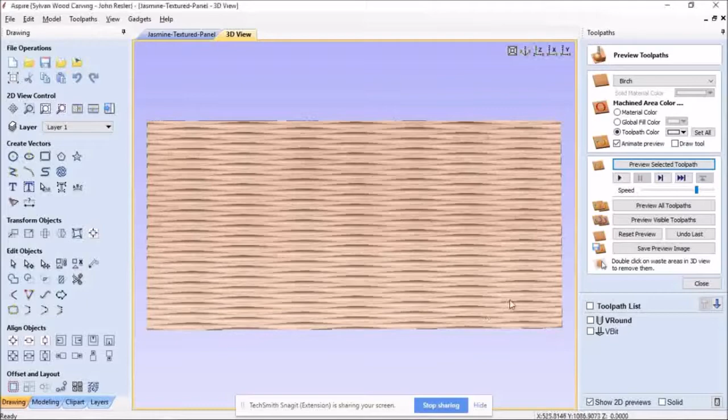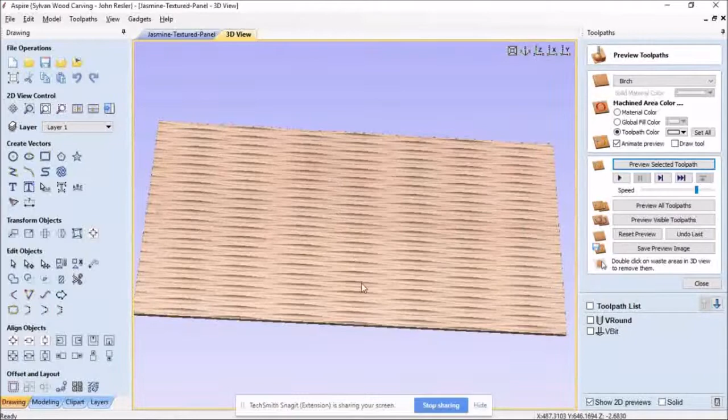Hi, it's me again. Today I got into the wood shop and worked on a gift, or I guess I should say reimbursement, for the lady next door. She has always been really nice about watching our dog Lily, a 75-pound American pit bull who can be quite a handful at times. But Jasmine, who watches her, really seems to like her, and Lily likes Jasmine, so that makes things very easy.

Now, for those of you looking closely, you'll notice this textured panel looks a lot like a tutorial done on the Legacy Woodworking site. That's because I watch their videos once in a while. They have good training videos on Vectric and stuff, and so that's what this is.

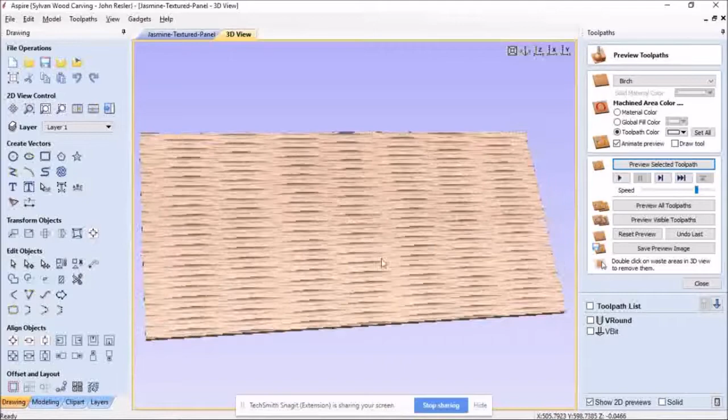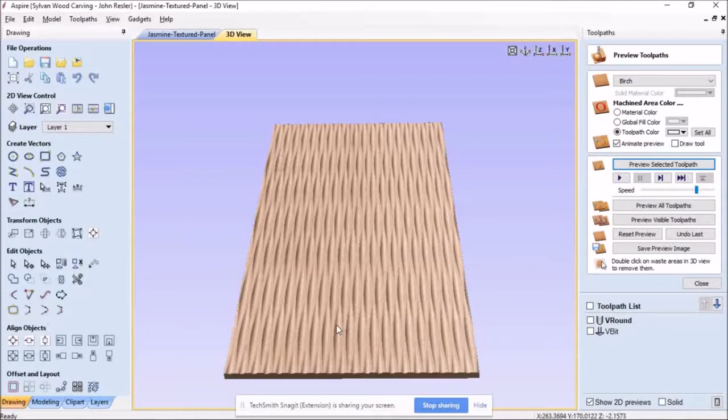It's actually a V carving, not a 3D model. They work really hard to try and use V-bits with profiles as much as possible, because it increases the speed of the cut tremendously over what it takes to do with a CNC doing a 3D model. So they've got a nice texture going here, and it's just varying depths with the same lines running back and forth.

If you want to see what the model actually looks like, that's it right there. So let's see what it looks like whenever we clear the preview, reset the preview, and preview all toolpaths. Let's speed it up a little bit there.

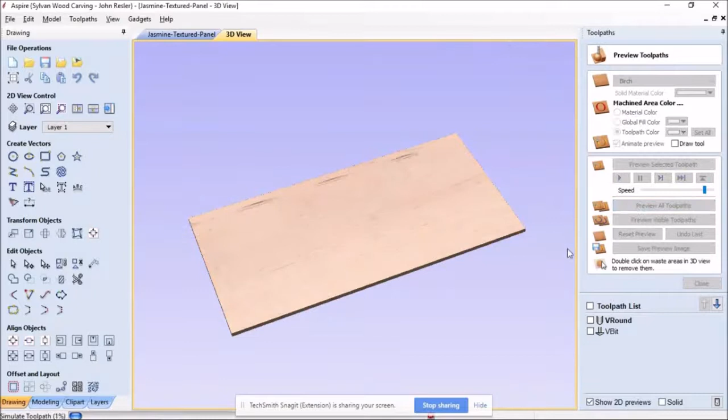You can see that it's just kind of gouging the wood out there. It's a 1-inch round nose bit, not a typical V bit, but the round nose gives it a real nice, smooth, sort of organic look that I really like.

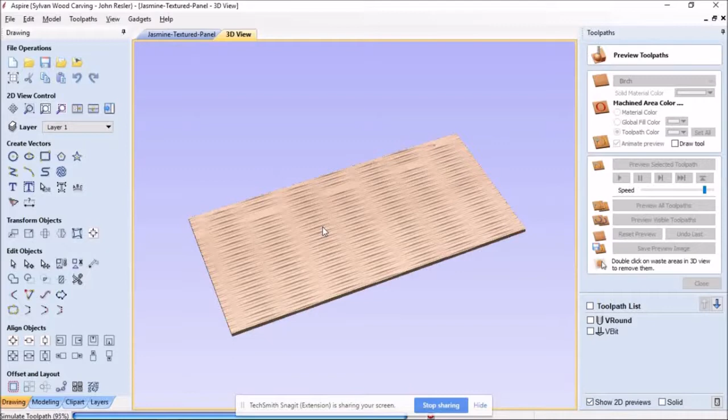Next time I'll try a 120 degree V bit I've got, to see how that works. I don't want to use tighter bits like the 60 degree or 90 degree, because there's a good possibility they'll go through the wood because of the depth of the V cut.

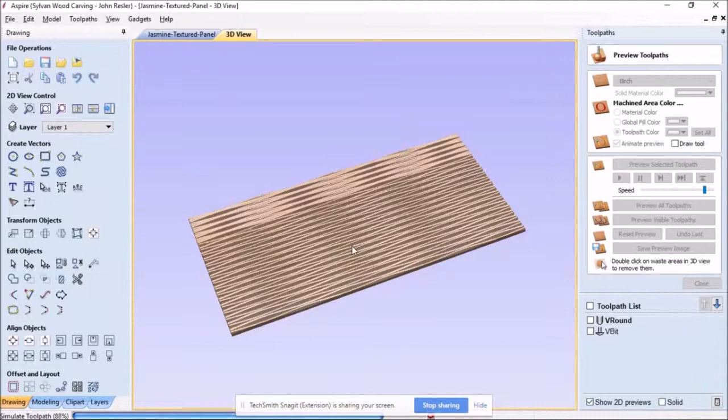So, you can see it turned out pretty nicely, and I was very happy with it. But the one thing I'll say is I made it out of MDF, medium density fiberboard, and man, that is a messy material to work with. It's not the first time I've worked with it, but it's the first time I've worked with it like this. Typically I do very quick 2D pattern cuts and stuff, but this time it was just sawing away, making lots of sawdust. All in all, though, I'm very happy with the way it came out.